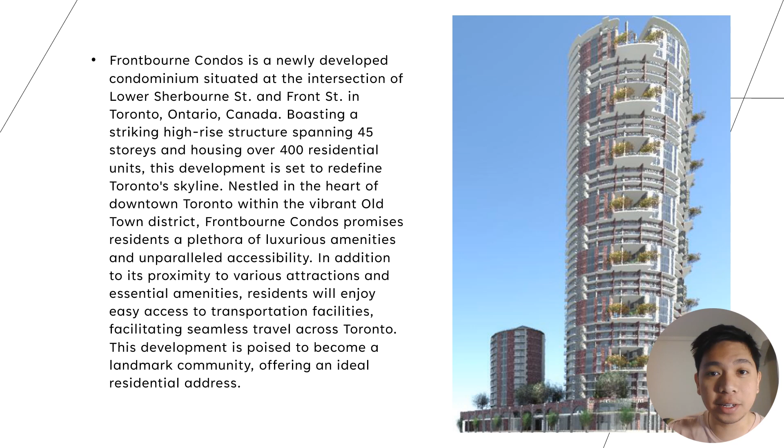For the sustainable design, our approach focuses mostly on maximizing energy efficiency and minimizing environmental impact. We did this by implementing passive design strategies like natural ventilation and daylighting, complemented by sky gardens to reduce energy consumption and enhance resident comfort. Additionally, our building envelope materials are carefully selected for superior insulation and thermal performance, optimizing energy efficiency throughout the year. We're also incorporating green roofs, located above, which contribute to urban biodiversity and improve air quality to mitigate the urban heat island effect.

To promote sustainability further, we're integrating renewable energy technologies such as photovoltaic glazing and wind turbines that generate on-site renewable energy. Another would be efficient water management systems, including rainwater harvesting, which will significantly reduce water consumption and lessen the strain on municipal infrastructure. Finally, our design emphasizes optimal building orientation and site planning, to maximize solar access, reducing reliance on artificial lighting and heating, and minimizing environmental impact throughout the building's life cycle.

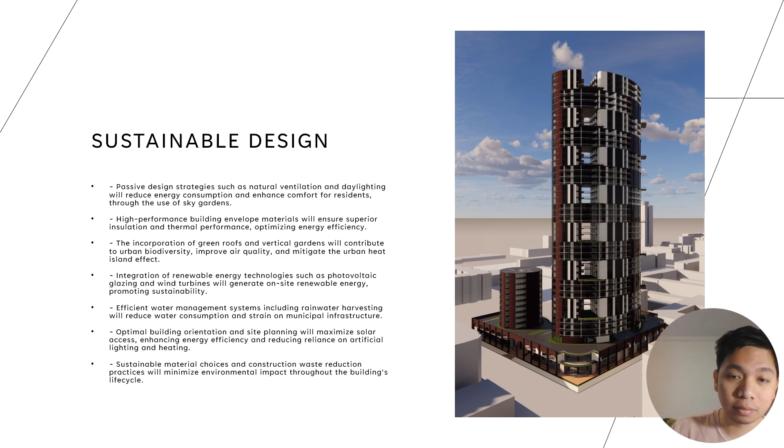For the urban design notes, we aim to encourage sustainable transportation choices and reduce reliance on cars. This promotes community connectivity and integration of green spaces for public amenities that will enhance community well-being, promote social interaction, and foster a strong sense of place. Lastly, through the brownfield development at Lower Sherbourne and Front Street, we're transforming an underutilized urban area into a vibrant, sustainable community, revitalizing the neighborhood while addressing environmental contamination concerns.

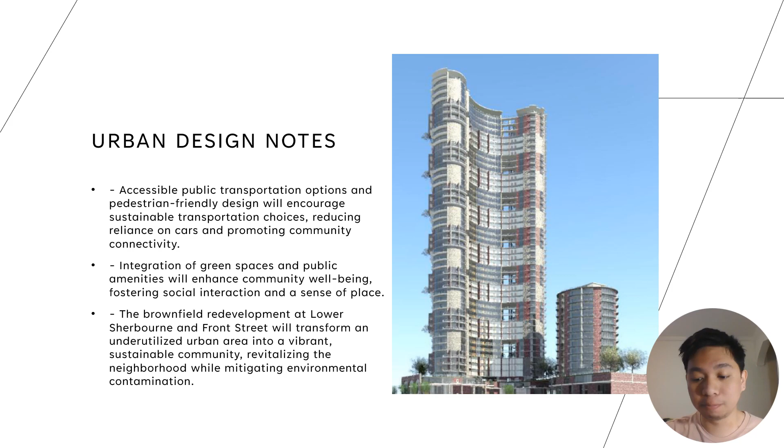So now let's proceed to the site development plan. For the overall development, we're ensuring strict adherence to standards and guidelines. All measurements for this project are in metric units, following the approved site plan. Construction will include precise site grading and earthworks, with vegetation clearing done responsibly. The project will also install stormwater management features and utility lines according to engineering specifications.

Roadways, parking areas, specifications, and landscaping will be constructed meticulously. Erosion control measures, especially on the lowest part of the site, on the lower portion of the screen, will be in place, and noise and dust will be minimized throughout construction. Safety is paramount, so stringent site safety measures will be in effect within the site development. Any deviations from the plan will require approval, and all standards will adhere to the City of Toronto standards for concrete curb, gutter, and sidewalk construction.

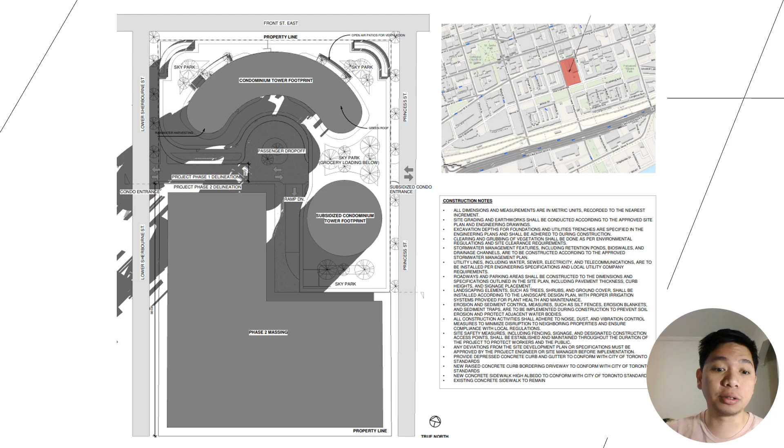Now for the floor plans. We will start with the lowest portion, the P1 to P3 levels, going to the ground floor plan, second floor plan, and third floor plan, which includes the amenity floor. Following that will be the typical condo floor plans and the unit layout.

Same as the site development plans, in this project we're maintaining rigorous construction standards, with all measurements in meters and centimeters. Non-load bearing walls are marked with dashed lines, while load bearing walls are solid and constructed with reinforced concrete or steel framing. This plan shows the typical parking levels, P1 and P2, with slots on the top portion for the condo and offices, while the lower portion is for the community center and subsidized housing core.

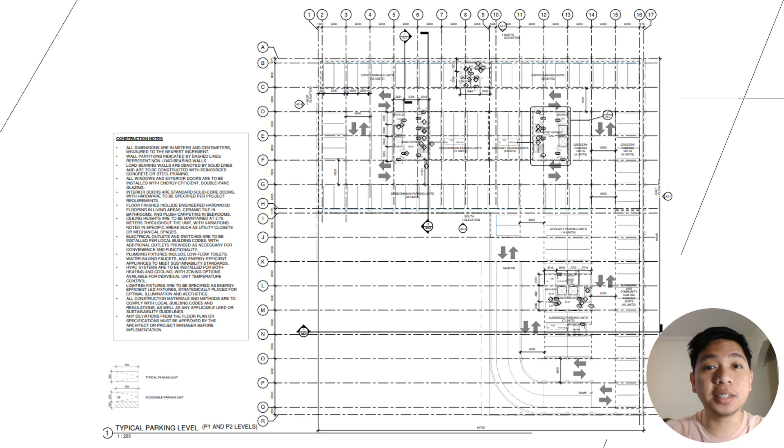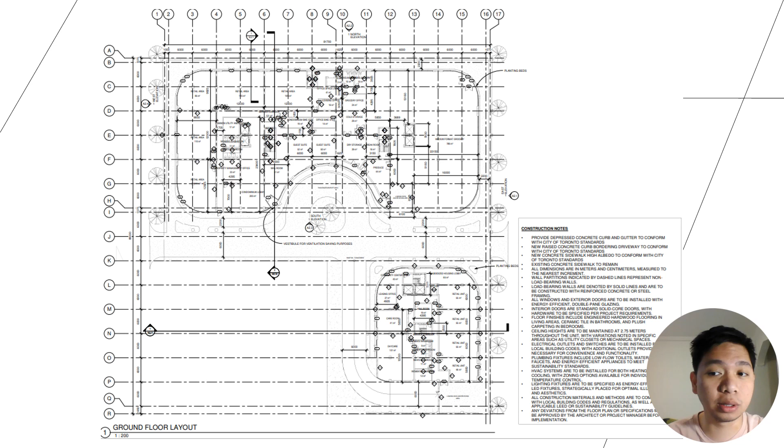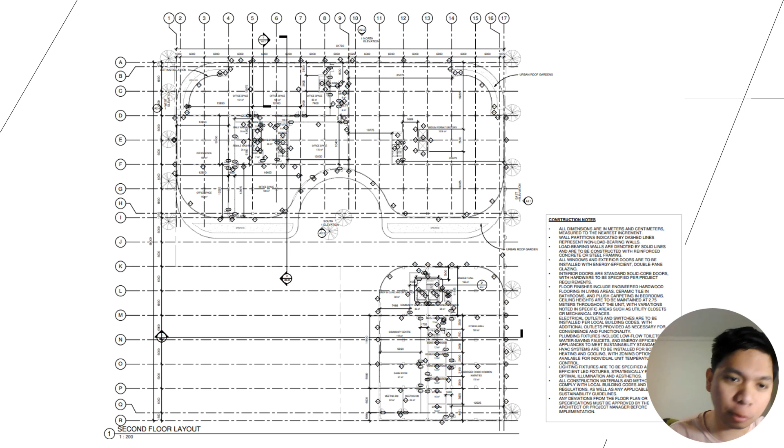Now that we've passed through the ground floor plan, which includes all the retail area, the grocery, and the areas for the community center, we'll proceed to the second floor, which includes the offices on the upper left portion of the plan, and the second floor part of the grocery on the upper right. For the subsidized area, on the lower right, it includes the amenity floor for the subsidized condo and some second floor areas for the community center.

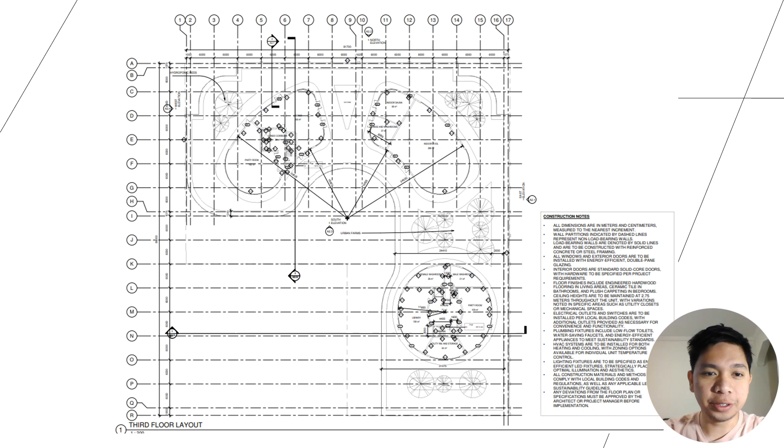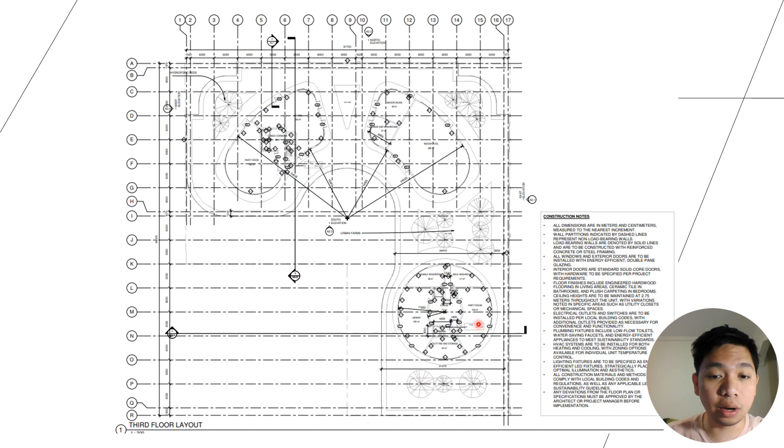The third floor plan shows the connection between the condo area and the subsidized condo. This area does not include any retail or office spaces anymore, but mostly focuses on all the amenities shared by both condos. Here we have party rooms, lounge rooms, and mini amenity areas such as the library, storage areas, and other utility areas for the subsidized condo.

Now we head off to the typical floor plan. I have two floor plans here for the condo. I'll show you the first one, which has this blank area on the left.

The design concept behind this is the use of sky patios, which you have seen in the first slides, alternating every 3 floors. That's why it's shown only on floors 11 to 12, 17 to 18, 23rd to 24th, and so on.

This floor has 9 units, and in this project sustainability is paramount in all aspects. All interior finishes and materials will align to LEED standards to minimize environmental impact and enhance indoor air quality, prioritizing low VOC paints, adhesives, and sealants to reduce indoor air pollution.

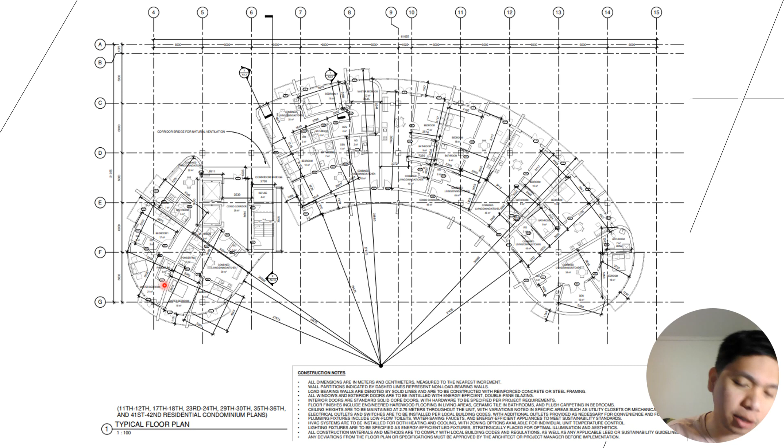On this left side are the 1+1 units, and all these are the typical 1-bedroom units. In between are the 2+1, 1+1, and 2-bedroom units.

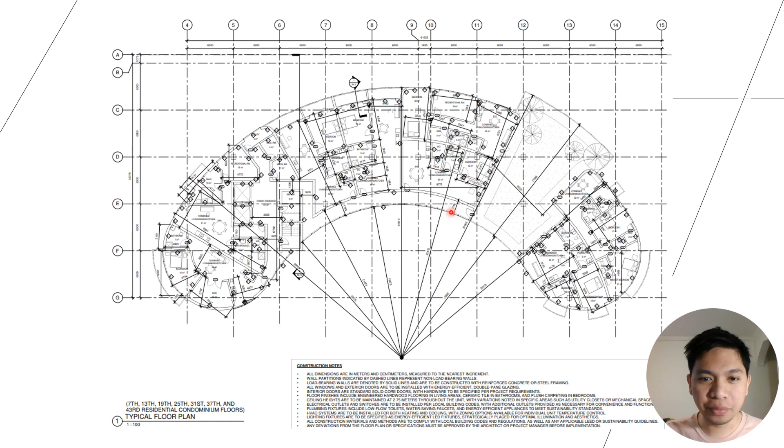As mentioned, the use of alternating sky gardens in this floor plan is version B compared to the previous slide. It's shown here that the sky garden consumes around 6 to 12 meters in width, while retaining the same form for all condo units.

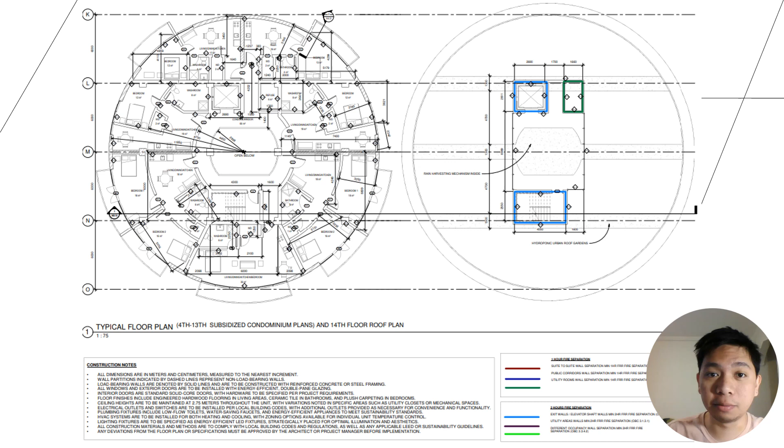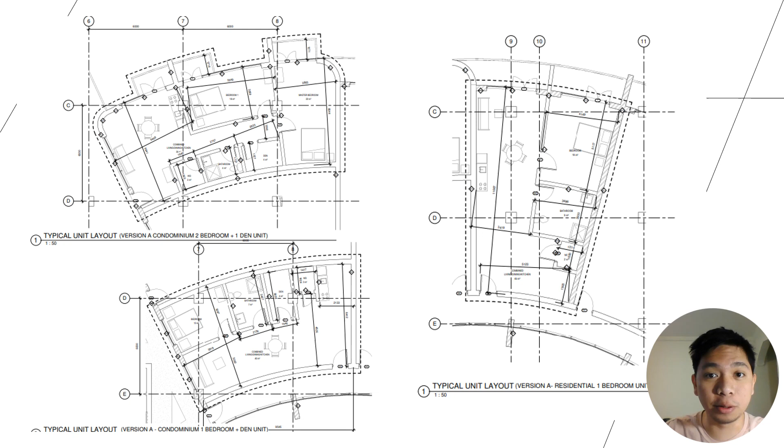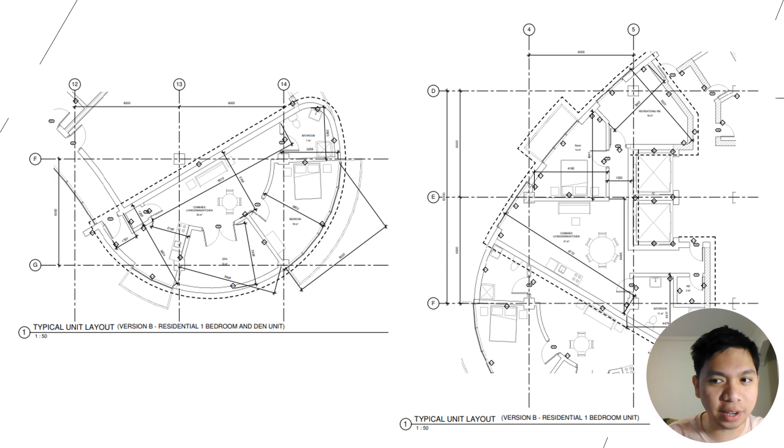The typical unit layouts shown in this slide are version B of the 1+1 for the condo housing, and another version of the 1-bedroom unit. Proper ventilation systems are applied to maintain indoor air quality, and waste management facilities are also provided to promote sustainable waste diversion practices.

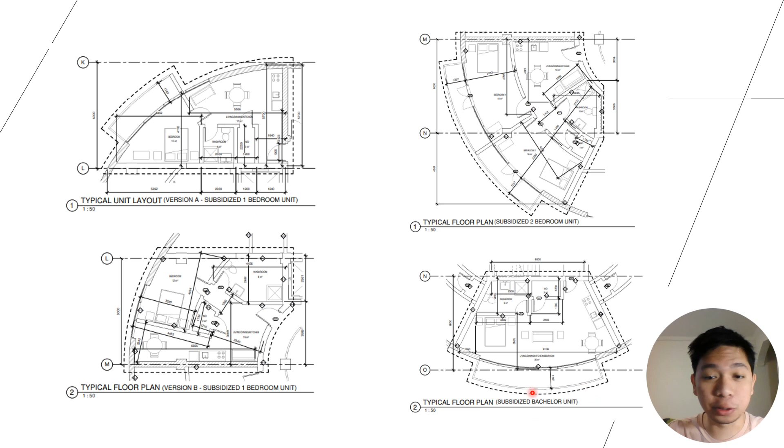Materials with high recycled content and sustainable sourcing are used to minimize resource depletion. Natural daylighting will be maximized and adequate thermal insulation installed to improve energy efficiency.

Now onto the elevations and sections. For the east elevation, we prioritize sustainability at every step, using responsibly sourced timber and recycled content cladding for the exterior facade to minimize environmental impact.

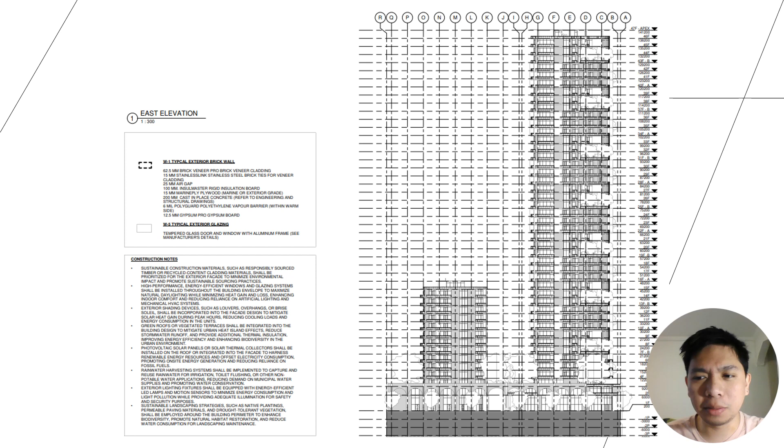Energy efficient windows and glazing systems will maximize natural daylighting while minimizing heat gain and loss. Exterior shading devices will mitigate solar heat gain, reducing cooling loads, and the design with sky gardens is bird friendly, respecting the environment and nature surrounding the site.

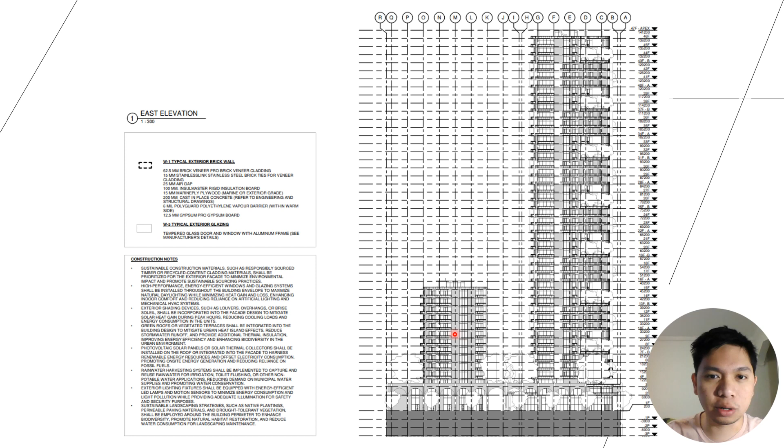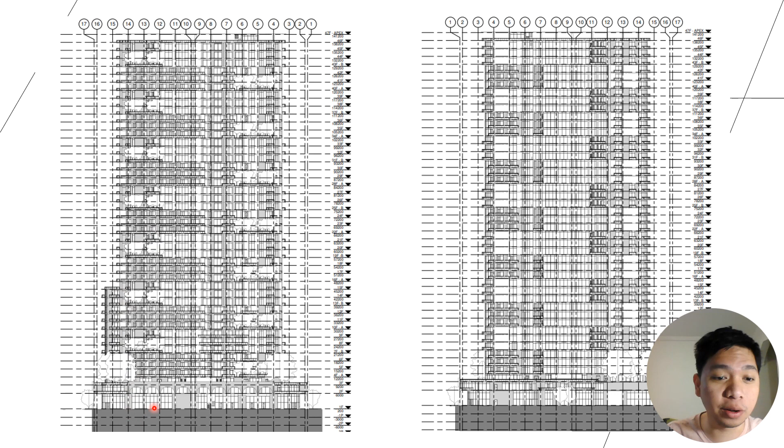Shown here are the front and rear elevations, which share the same sky garden concept, visible in the blank areas, with trees represented on the front elevation. In this elevation, I tried conservation practices and blended in the lower facade for the podium.

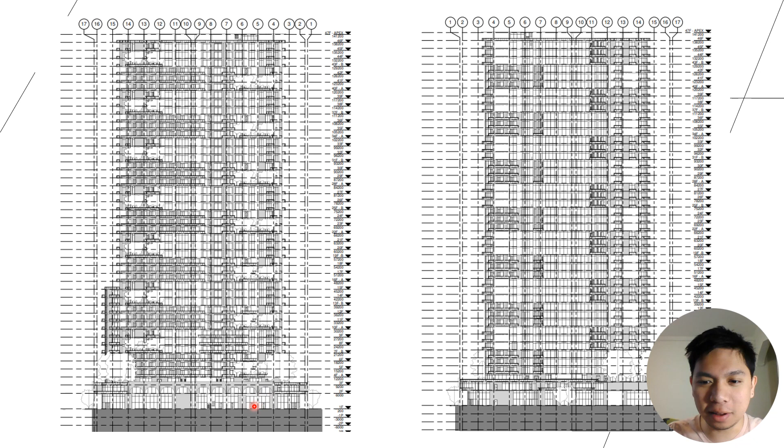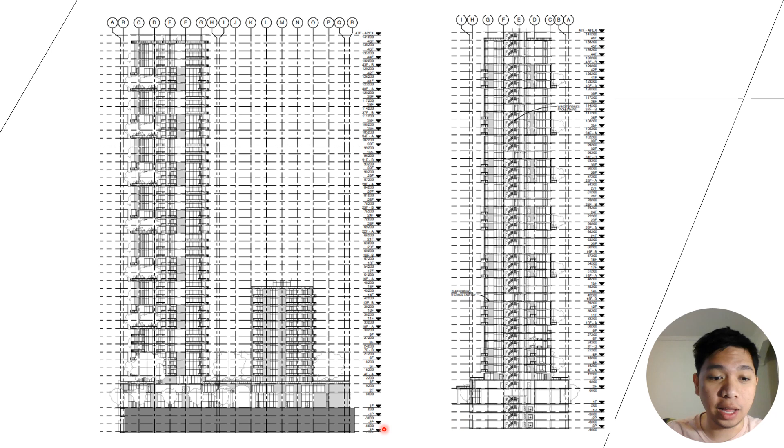Here is the right side elevation with its section along the core line. Sustainable landscaping strategies are applied here, enhancing biodiversity and reducing water consumption, especially for the roof garden, the sky gardens, and all the landscape features of the condo.

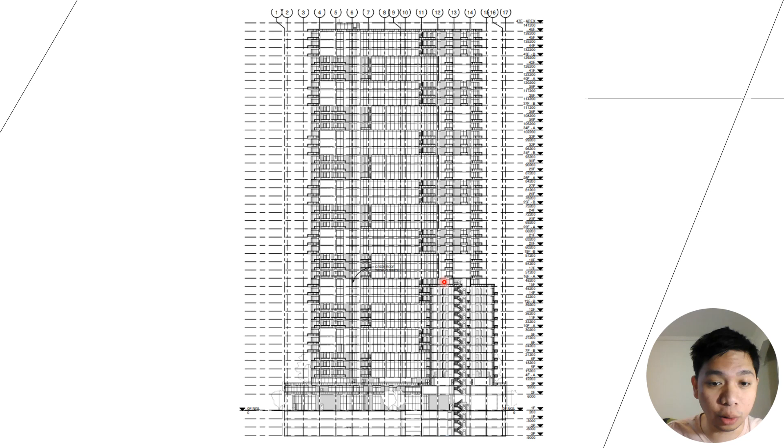This is the section along the subsidized housing along its core. The same principles apply from the first section.

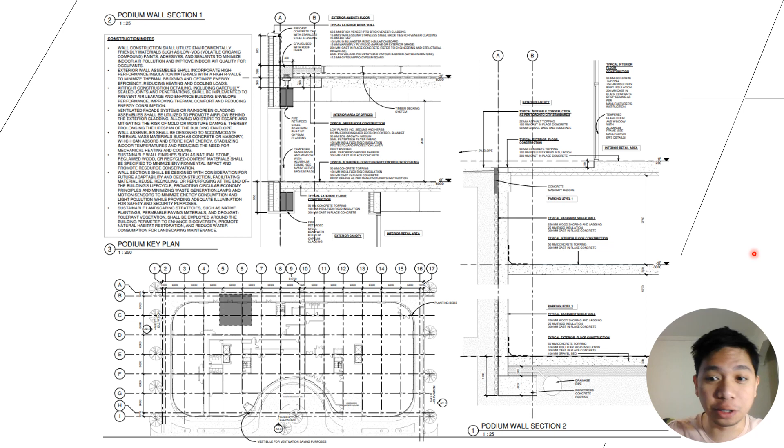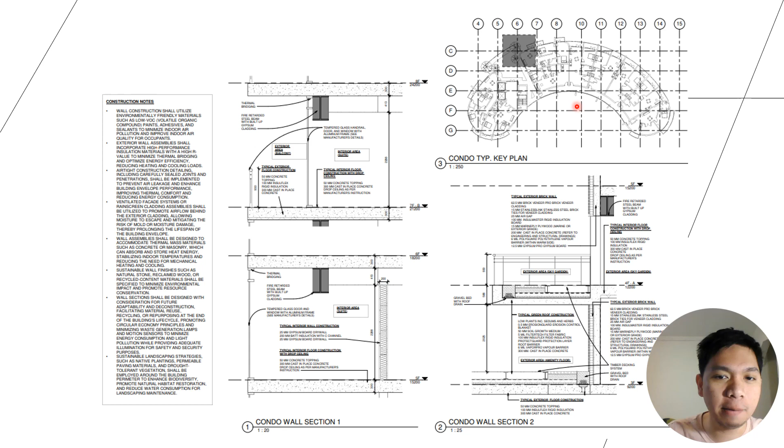Ventilated facade systems are also used to prevent moisture damage to the interior portion of the condo. Thermal mass materials will stabilize indoor temperatures, with sustainable wall finishes and considerations that minimize environmental impact to promote circular economy principles. This section is taken in the typical condo key plan along the edge of the sky garden.

This shows the wall section along the subsidized housing, along one of its units, using the same principles from the typical condo wall section detail, with sustainability observed as well.

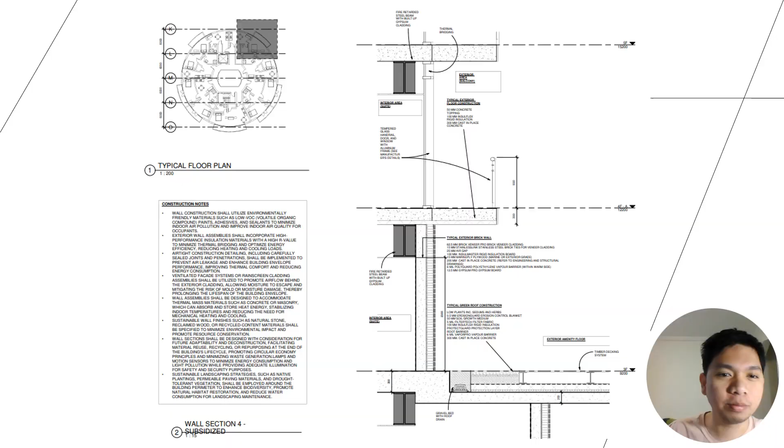And that is all for my project. Thank you all for your attention and engagement with my presentation. This shared commitment to sustainable practices will lead to better environmental stewardship in the future. Thank you so much and have a great day.